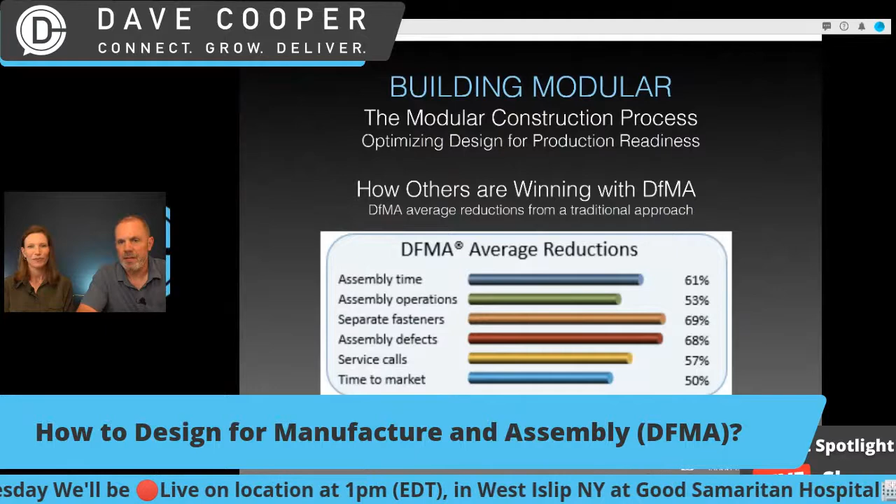Next slide. All right, what do we got here, Jennifer? Let me move this out of the way. Yeah, so this is an example of how others are winning with DFMA.

And this is a study that has been done across many different industries. This is not just construction. This is average reductions from a traditional approach across the automotive industry, the tech industry, so many different industries out there who are in the business of product development. Everybody from Dell computers to Harley Davidson motorcycles. It's all about designing before you manufacture.

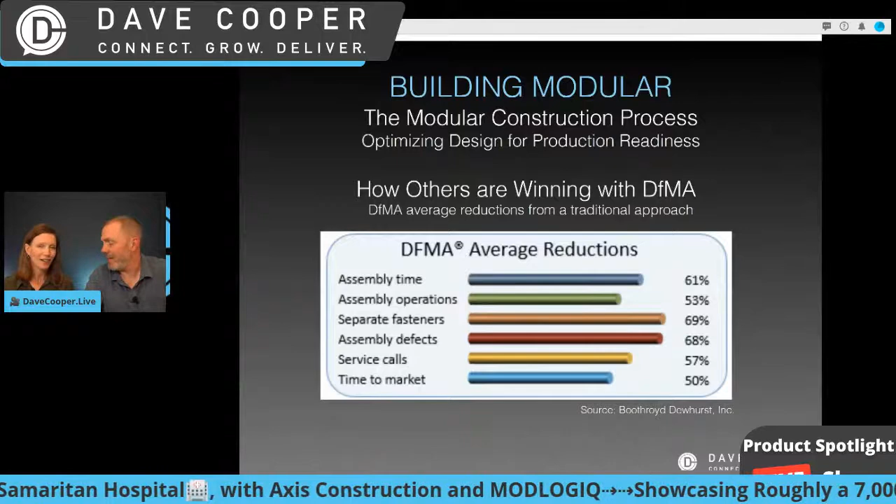So these are some reasons why this is such a powerful tool in your tool belt. You reduce your assembly time by 61%. Yeah, I mean, that's a lot. Huge number. Yeah, for sure.

Operations, huge reduction there, separate fasteners. So when you're building in terms of components or volumetric modules, there's fewer connection points on site, so there's fewer needed. If you look at this list, you're going to be above a 31% time reduction across the board.

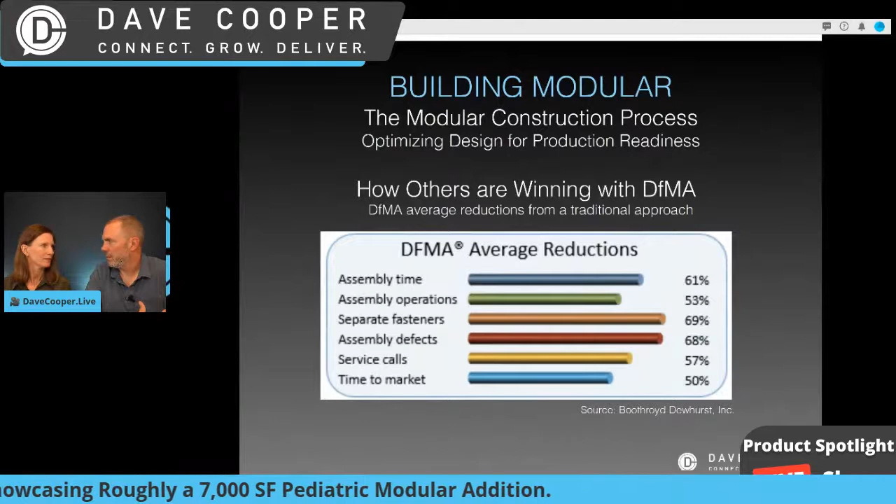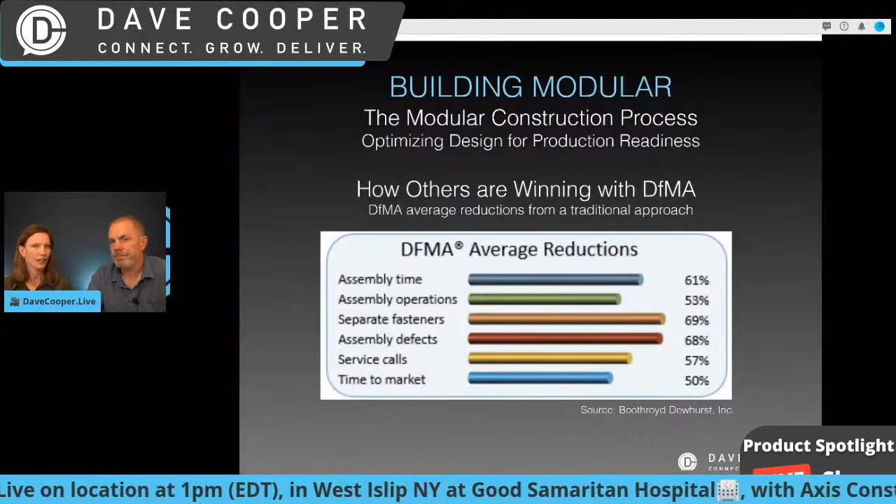And I'm just going by the separate fasteners, right? 69%, 31% increase is the minimum of what you get by using this. Yeah, and that's just it. It's what components can you build offsite, pull it forward, and still deliver that resilient, high quality, durable product.

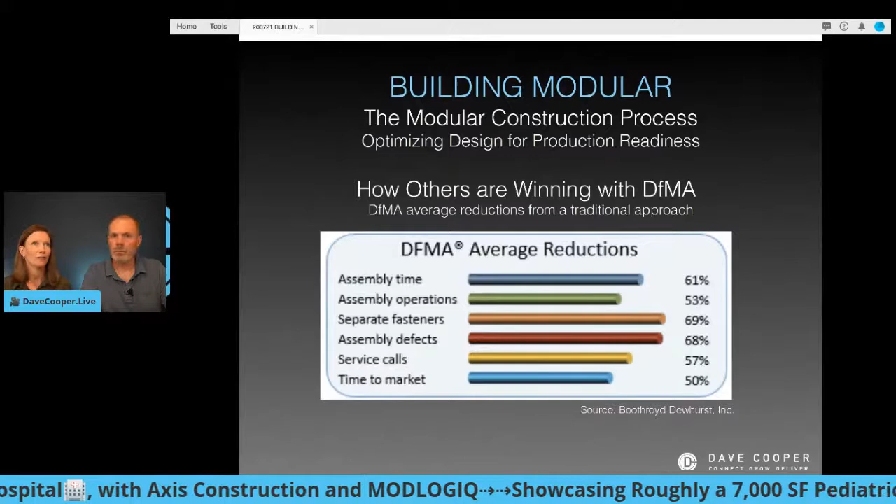Another one that I love is the service calls, and the one that everybody loves is faster to market. Right? Faster to market, heads on beds. Absolutely, faster to equity, people are making money. We were talking to some architects recently who were talking about—and obviously this was pre-COVID—

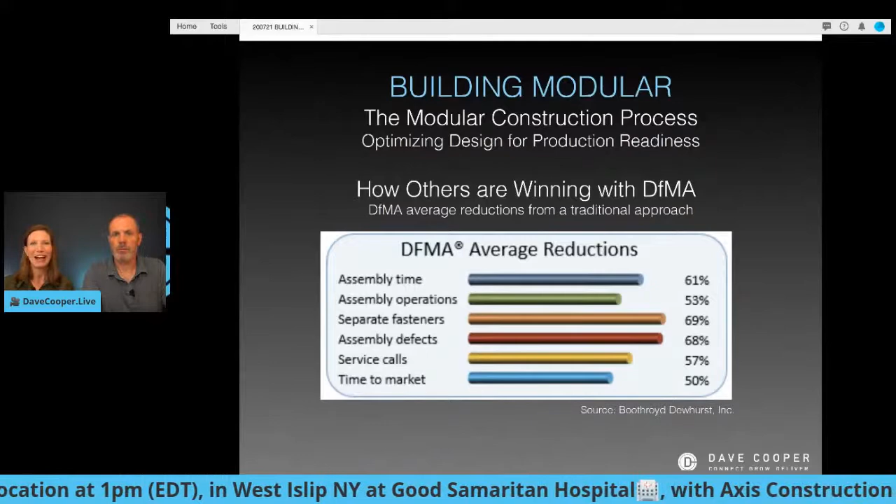the speed required to build hotels and resort locations. The way that they measure time and profitability is how fast can we get that bar open? With that beautiful view of those Florida beaches. How fast can we get that? Bring people in, open it, so they can start seeing what's happening.

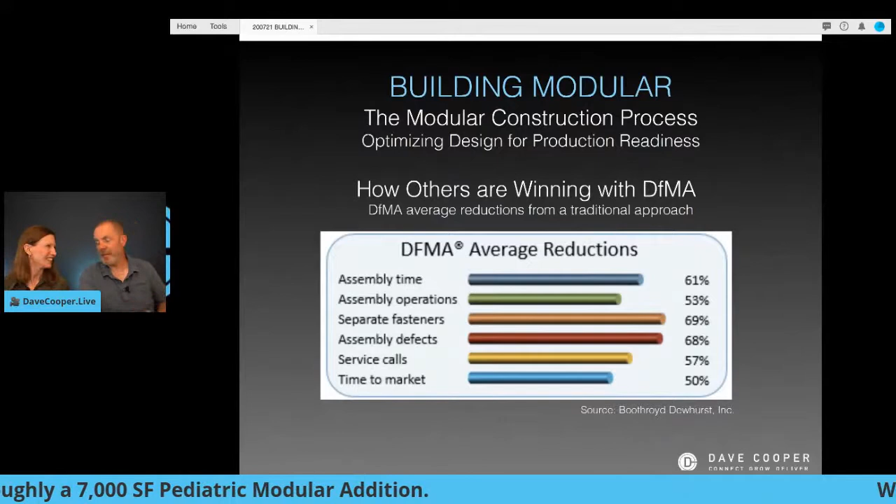Exactly, absolutely. So when you think about time to market and faster to equity, those are some examples of why this is a win. Yeah, I think this is a great visual. So why DFMA construction, right, Jen?

So we're starting here. This is a win for everybody, regardless of your method of construction, whether you are choosing to use one of the modern methods of construction, offsite, volumetric, industrialized construction, whatever word you want to use. In the end, we're building homes, we're building commercial structures.

Well, but it is fragmented. It is antiquated all the way across the board. We tout this on every live show, and people are probably so tired of me saying it, but we are. It's horrible, and I'm tired of being in last place. Right, and this is helping us get out of last place.

Antiquated, I think, is even not old enough, because, I mean, we haven't changed in 100 years. The only thing that's changed is instead of plugging in your saws, we got a battery to run your saws. That's really the only thing that has changed.

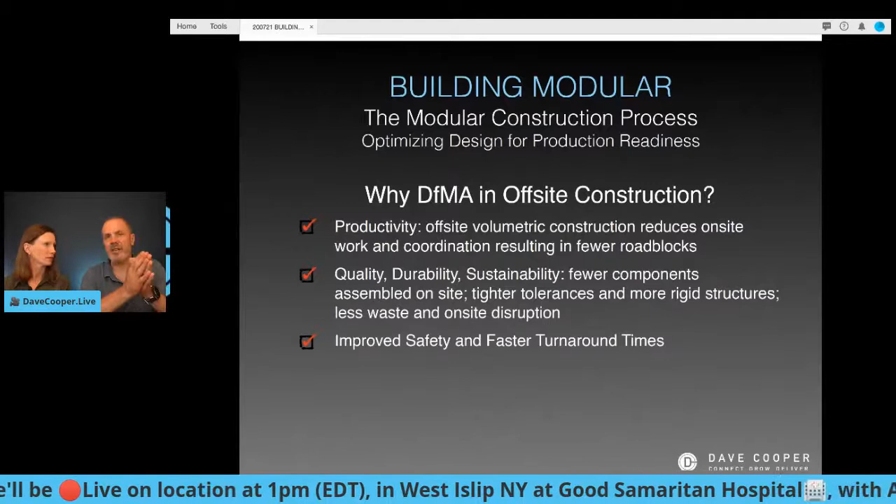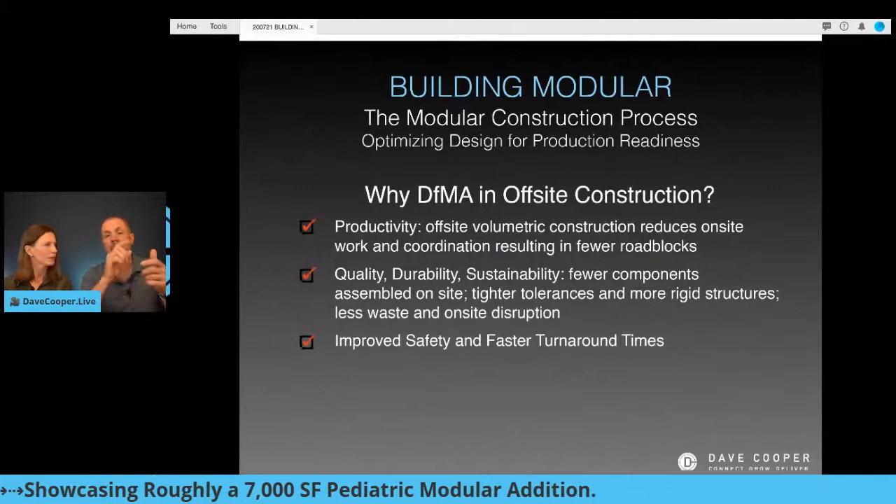So when you think about the insurance implications of that, that's a huge win too. That's the whole life cycle people don't look at with offsite construction—they just look at what a 2x6 wall costs at a manufacturing facility versus on site. They don't factor in ancillary costs like insurance savings, health savings, risk reduction. This goes all the way through workman's comp, liability insurance—it's all savings, and when you add it up, it's a big deal.

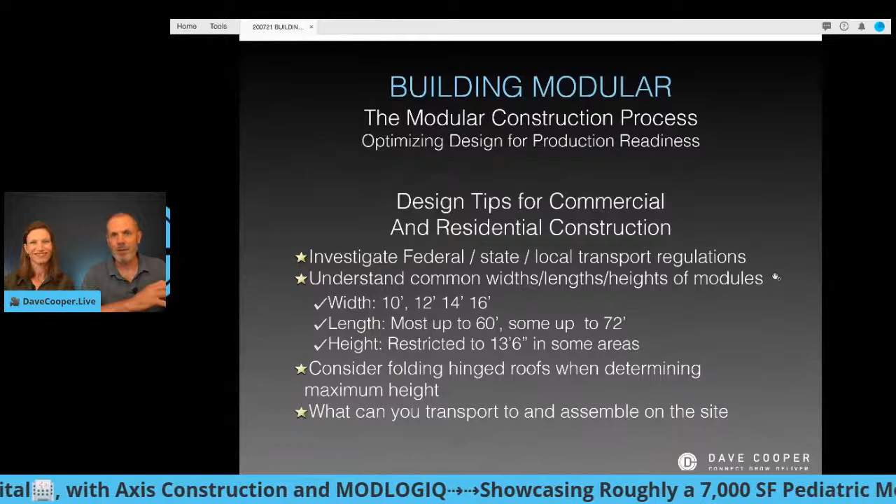And at night, they have you deliver, and then they yell at you because they're backing up in a residential or commercial area, and everything's going beep, beep, beep, and neighbors are complaining. So you need to understand all of these different regulations and rules.

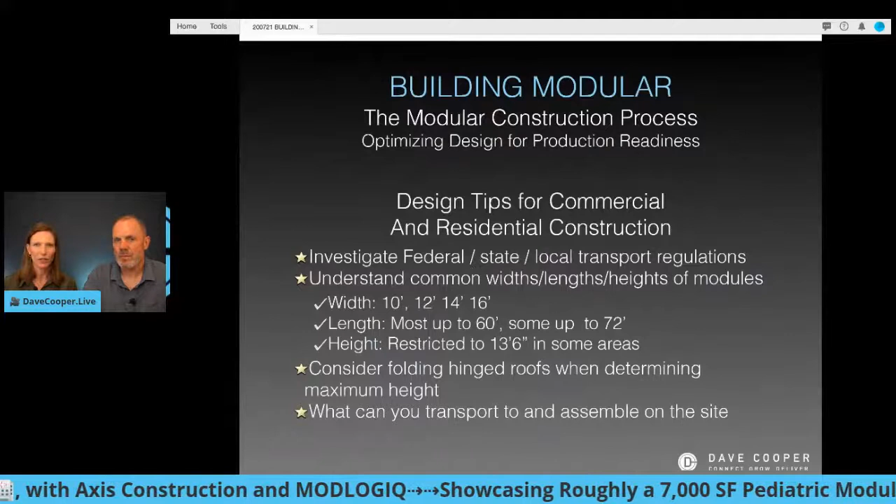So, but just in understanding, where are you going? Again, it's the logistics. It's the homework that we did a few episodes ago with our site surveys and our transportation, making sure that we can get there. Are there any low bridges or overpasses or weight restrictions, that sort of thing? And then just understand what the common widths, lengths, and heights are of the modules.

Well, that's a big deal. So it depends on where you're at, right? If you're in the Carolinas, the Midwest, out west in certain areas, you can go as wide as they can do them out there and as long as you want to go. Long, straight, boring.

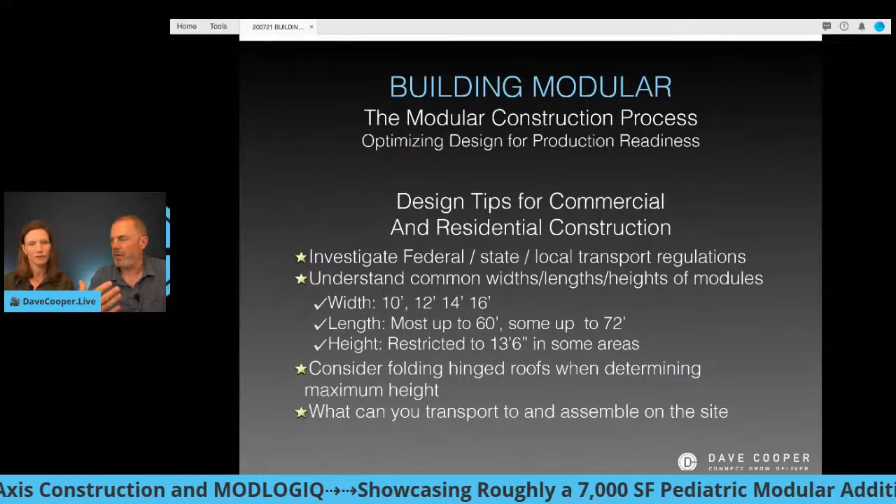But depending on where you're at, if you're building in urban lots, infill residential, infill commercial, hotels, whatever that case is, there's some limitations, and it's based on transportation. It's based on making turns. It's based on DOT, Department of Transportation regulations, on what they're going to allow you to transport.

And where do you find that happy medium between cost effective and the permitting so much it makes the job unattainable? Yeah, and that's where modular kind of falls. If you stay within certain parameters that the DOT has set, where you're building, and you really do your upfront work on where these are going, you can design this whole thing with length and height right into the design process in the very beginning.

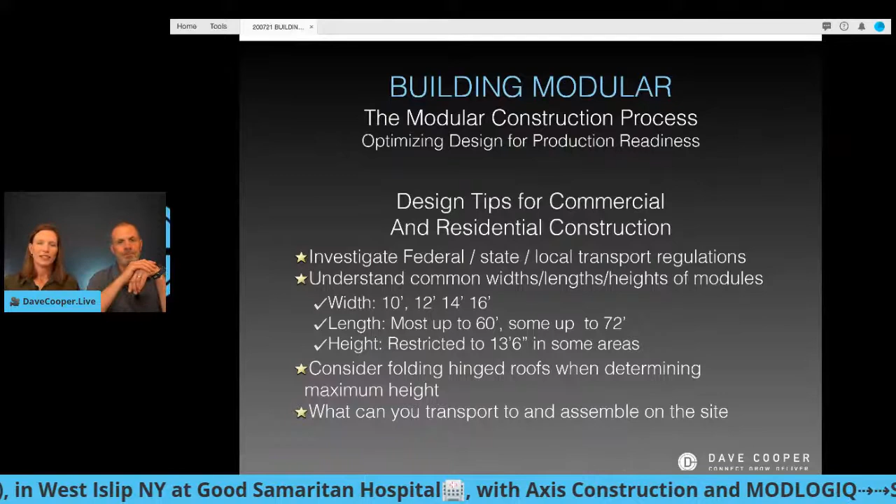Definitely. And a great example of this are the two Pittsburgh job sites that we recently were on. First was Module, and then the other was Blockhouse Residential. Both of them used modules that were 16 feet wide, 9-foot ceilings, but different lengths. And just by being inside of those spaces, you can see how big and open they can be.

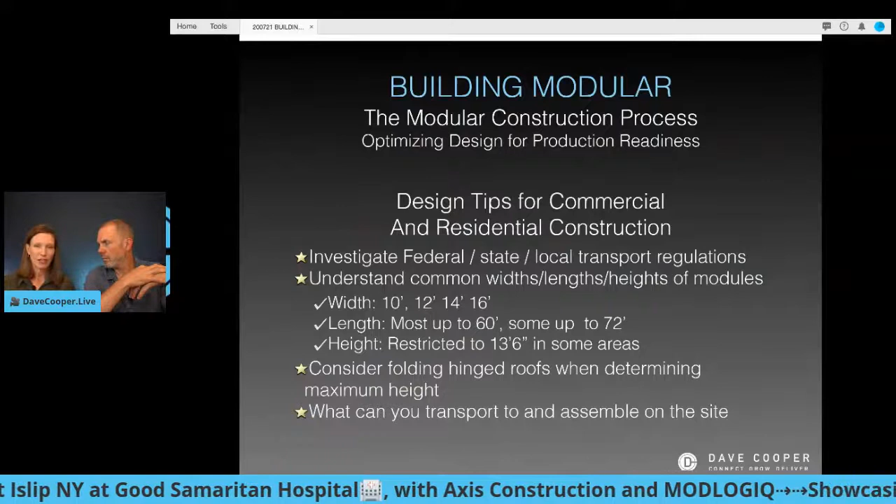And then when you start setting them next to each other and you're setting them on top of each other, and you're playing like Legos, right? You have L shape, T shape, I shape, there's so many different things that you can do with the modules, but really you want to stay in multiples of the widths, just so that you're not creating an unusual size.

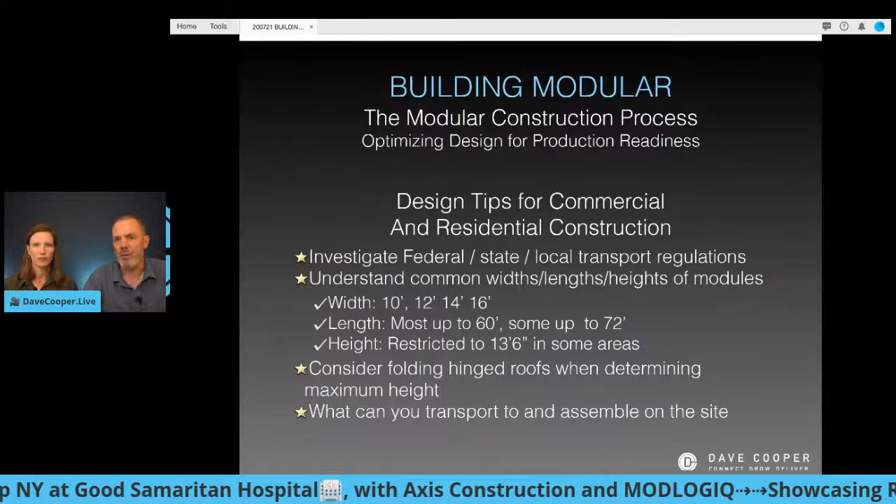Yeah, I mean, you can do it. It's not a big deal. It just depends on if it's a roof line or where it is. So I think what you're saying is, use the economy of scales, use the efficiencies of design, and by making equal parts, that happens. But unfortunately, in today's world, it doesn't always happen that way. But that's where you can design for really engineering efficiency. Yeah, value engineering, I think is what we call it.

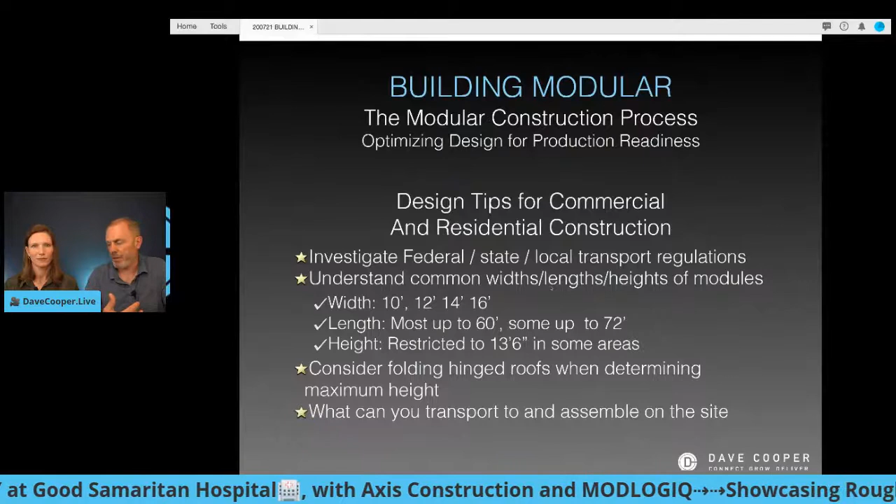Exactly. So for sure. And then considering, when you're designing, you also got to consider, like you said, your roof. Your roof adds height to all these things. So those of you that don't do modular, you may say, hey, I want a 9-foot ceiling for second floor, but bridge height's 14 feet, and you're on top of your trailer that's towing it. The numbers don't always work.

You need to understand what you're designing. You're going to go for a 12-12 pitch. That's a fold back and probably some extra roof boxes or ridgeline boxes that are going to run with that. So designing and understanding where you're designing is what, Jennifer, you're talking about. And that's understanding that. And that not only goes from the roof, but also the dormers.

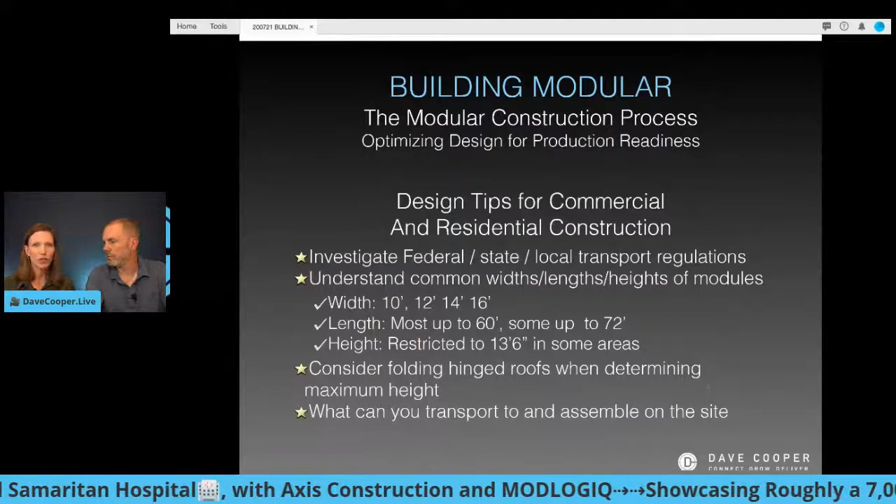Absolutely. And a lot of times, people might even put dormers on a separate carrier. They might lift them into place. They might build them as their own separate units. So there are lots of creative ways and lots of workarounds to still get that custom look that you're looking for. Just keep in mind, when you're working within these parameters, you are creating those efficiencies, those economies of scale. That modular construction definitely offers a unique advantage.

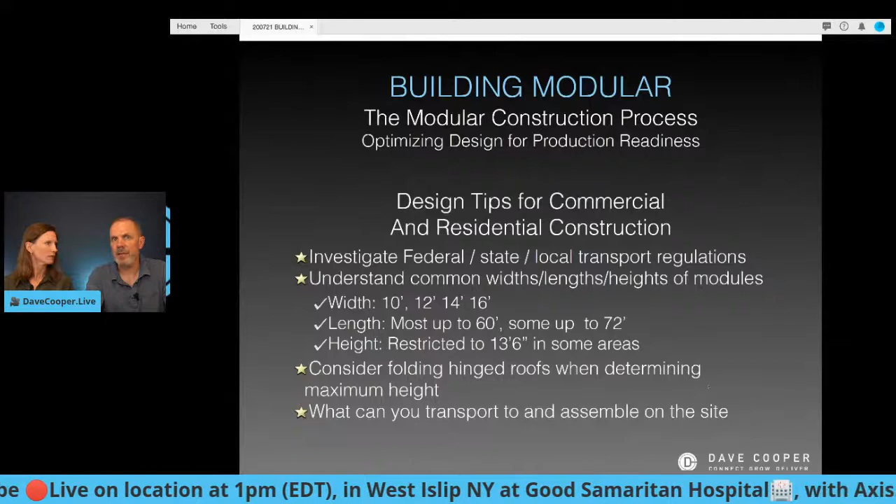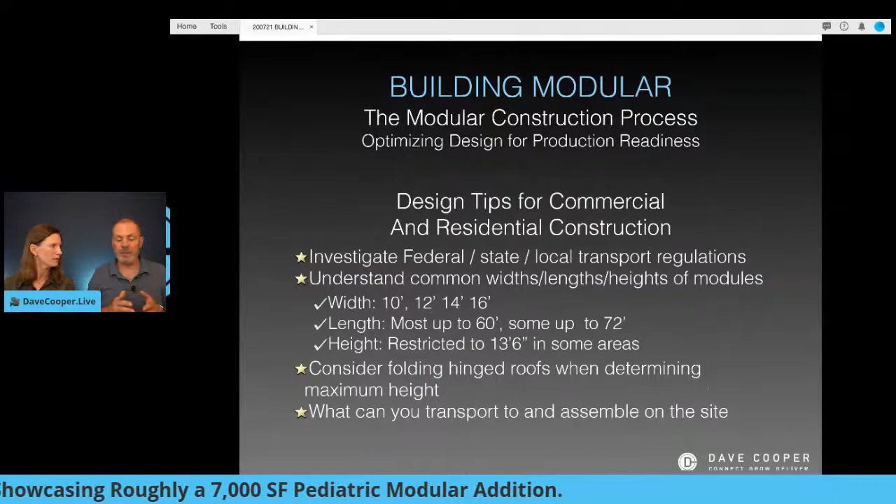Sure does. And DFMA isn't necessarily designed for the custom one-off builder, right? They can use all the practices, they can do those things, but there are also things that you can incorporate on site. The DFMA standards and the really great efficiencies come out of residential, commercial.

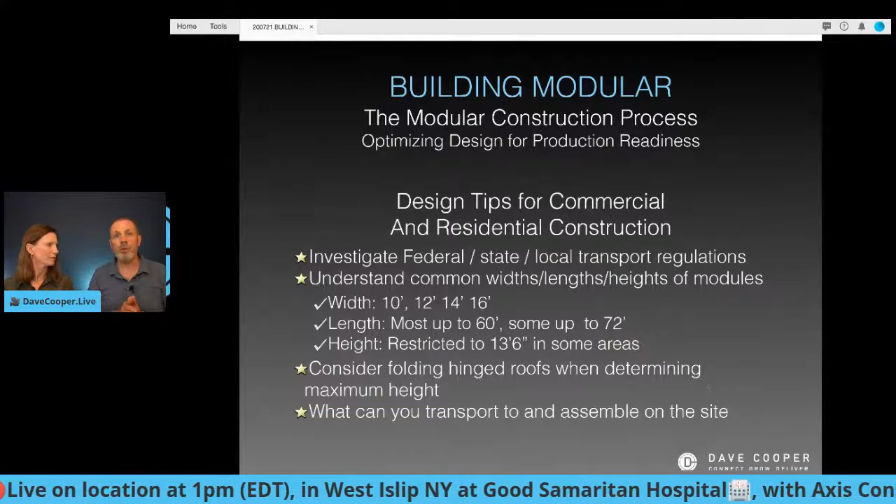So when I say residential, repeatable business over and over. All the studies are showing that that's where the residential market's going with the millennials and others, coming up with great designs, interior layouts, high efficiency, low energy build, healthy homes is where it's heading.

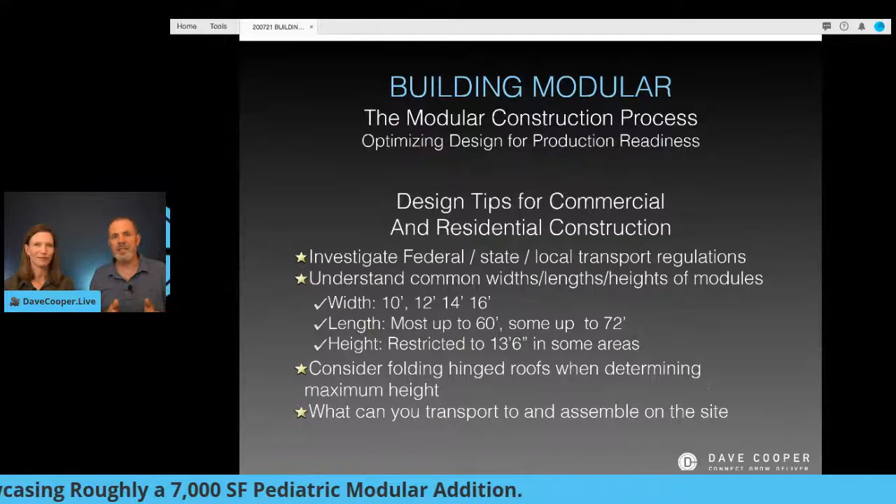So what does that mean? That means we're going to be able to get more into a DFMA process on a lot more homes in this country and help make up this 1 million home deficit that we have. Absolutely, with healthy homes, by the way. Healthy homes, so that's the goal.

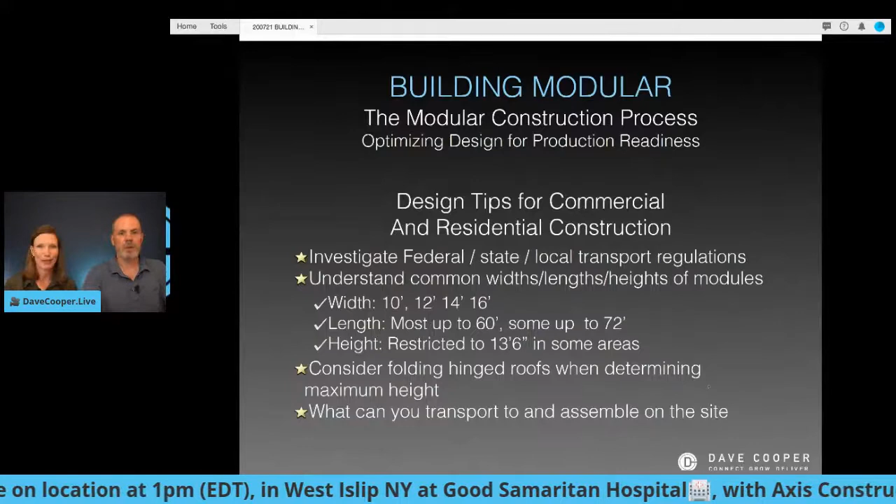Yeah, so next slide. I saw the look. What are you doing? Sorry.

There we go. So Dave sort of touched upon this, roof lines definitely come into play. It's something that you have to plan for in terms of what that module will look like when it's being transported, and what those dimension lines are. You have to know your heights, right?

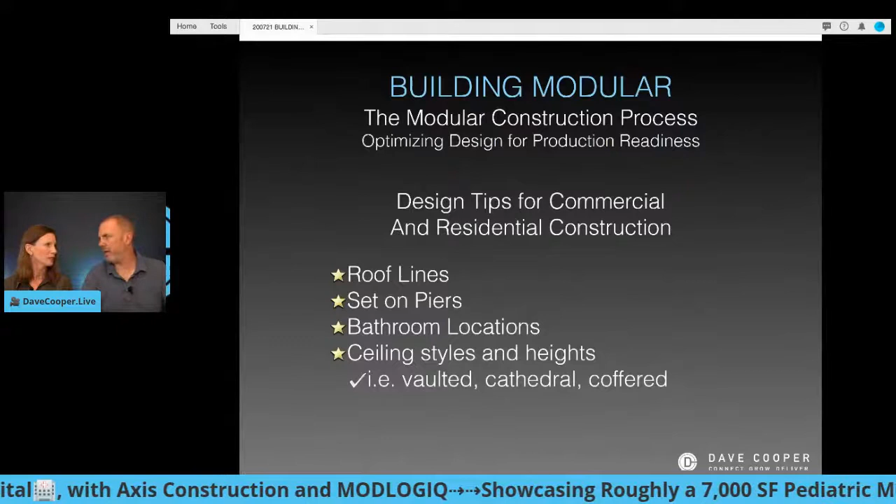And this is where getting into 3D modeling, the factories can help you with this too. We've been doing this a long time. The factory's been doing it even with their 2D CAD programs and what have you, but getting into 3D modeling, you can BIM all of this out.

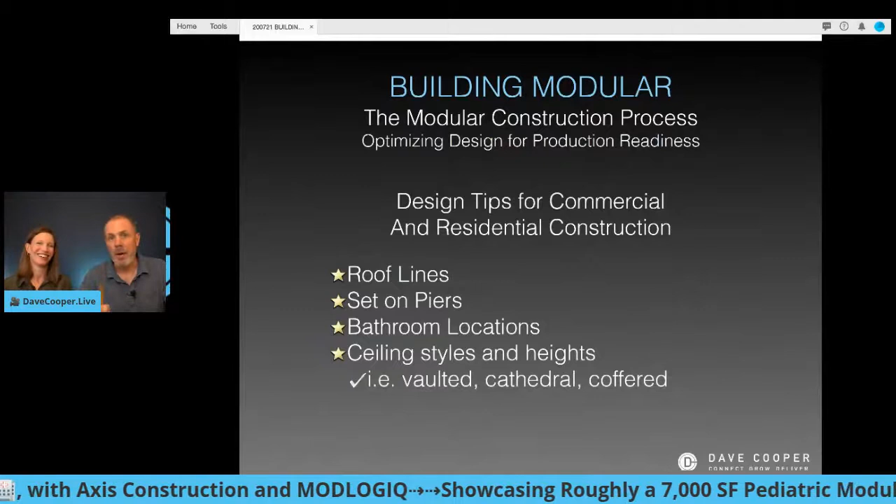You can look at bridge heights if you want. You can say, hey, I want 20 PSI in my tires because 30 PSI is going to be too inflated to get me under the bridge. I'm kidding, don't do that. But we've had to do that to get under a bridge here and there. The reality is you've got to pay attention to all these things.

Roof lines make a big difference, not only on height - I've got my pencil like I'm a teacher - not only on height, Jen, but guess what else it makes a big difference on? Width, right? Yeah, of the overhang.

So when you're shipping a module, whether commercial or residential, most of the transportation rules are going to say, if you have an exterior light or an exterior GFI, that counts towards your width. If you have a GFI box cover on there with the plastic cover, that counts towards your width in a lot of states.

So these are things you have to look at. If you have your eave overhangs, you say, I really want that 16-inch or 24-inch eave overhang, great, you can have that. We've got to look at it differently and flip them back forward, because guess what? It counts towards your width in a lot of states.

So remember that when you're designing, that height and width isn't just about getting under bridges and through an underpass. It also has to do with the regulations, and all the little things count.

Yeah, absolutely. And listen, this is all about getting through that first exercise, because once you get through that very first exercise, you're going to learn so much along the way. It becomes very real, that learning. Should I give my education costs money speech, or have they heard that too many times? Education costs money. All right, we're moving on then before I get thrown out.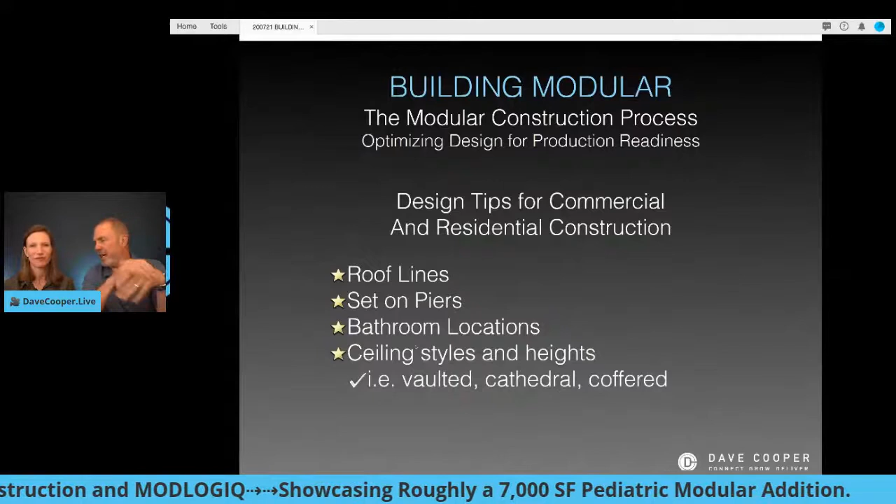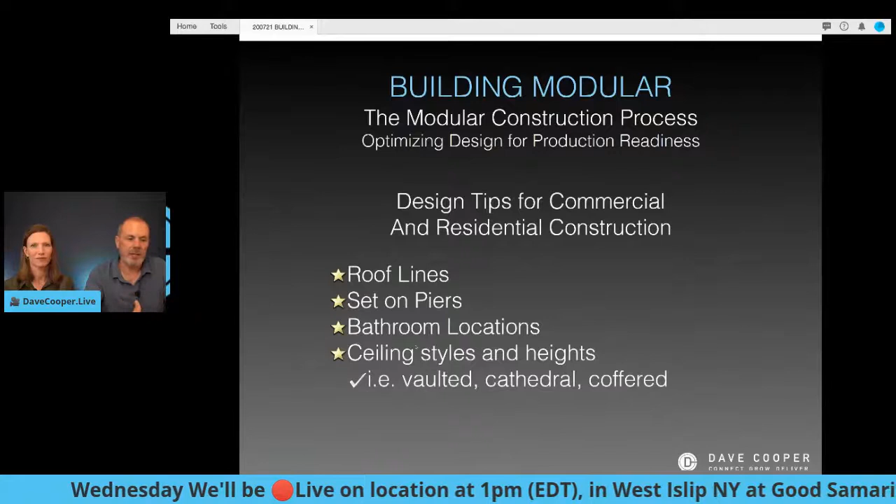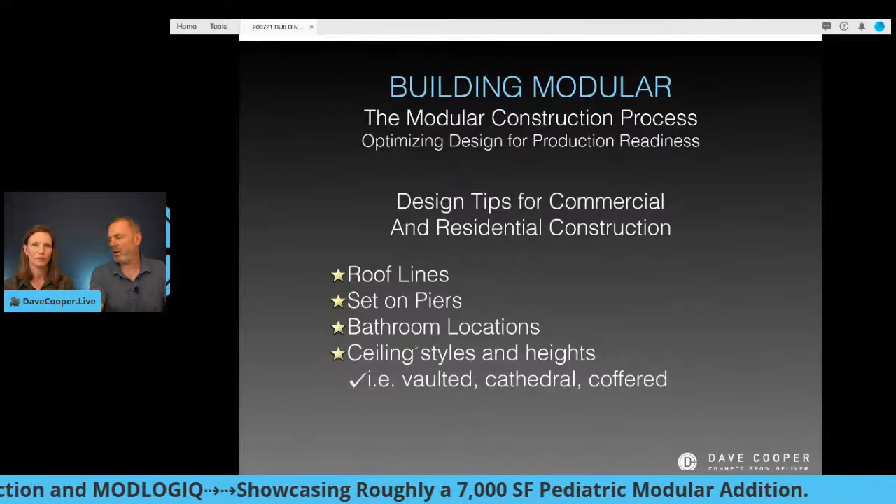Okay, so here we go, Jennifer. Ceiling styles and heights is also another issue when designing, not just ceiling, but that plays into the ceiling height, right? You want vaulted ceilings, cathedral ceilings, or any of those things. They all play a role in what you can do and what you can't do at the manufacturer. However, you are not limited to anything that you want to do, even with DFMA. It's just a matter of what you take on site, because every house is a square for the most part.

Yeah, but this just brings up a really good point, because when you're doing some of these design elements, especially for those of you who are still working in two-dimensional plans with your clients, you have to think about where that coffered ceiling crosses a mate line, possibly, or connects with a flat ceiling, and how does that get built in the manufacturing plant? So these are the details that you need to be looking at.

Again, if you're modeling in 3D, it's much easier, but if you're working on paper, you just have to see where those different ceiling techniques come together and where you're crossing mate lines. So the marriage line is a really important element from a design perspective, and we're going to talk about that a couple of different ways. But when it comes to where different ceiling styles meet, you really need to pay attention to that.

And I'm just going to back up - you don't have to put it up - just in terms of homes that are set on piers and other things, like what we were talking about earlier with bathrooms in the pods.

So you're not limited to where your locations are for bathrooms, kitchens, or toilets or any of those things, is what we were getting at.

However, with DFMA and assembly, if you design houses with the core house having bathrooms and kitchens all around it, the efficiency of that structure is through the roof. But you're not limited to that. You can have bathrooms on any side of the house you want, just like any traditional home.

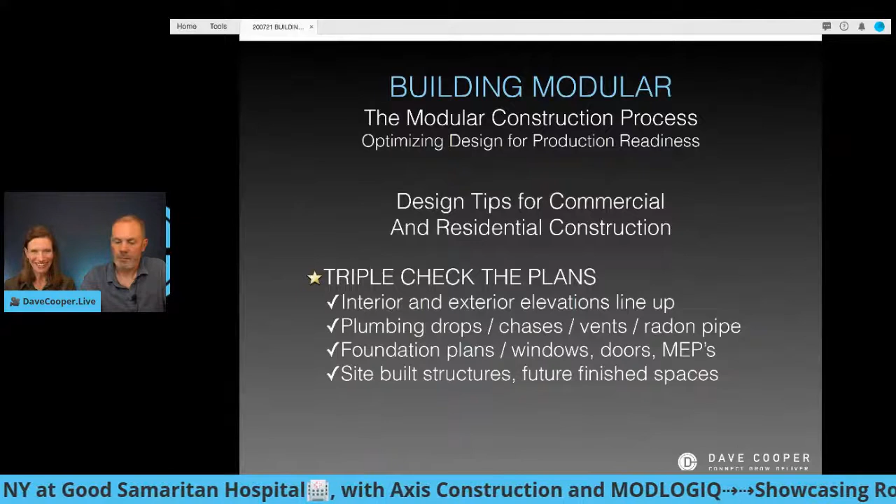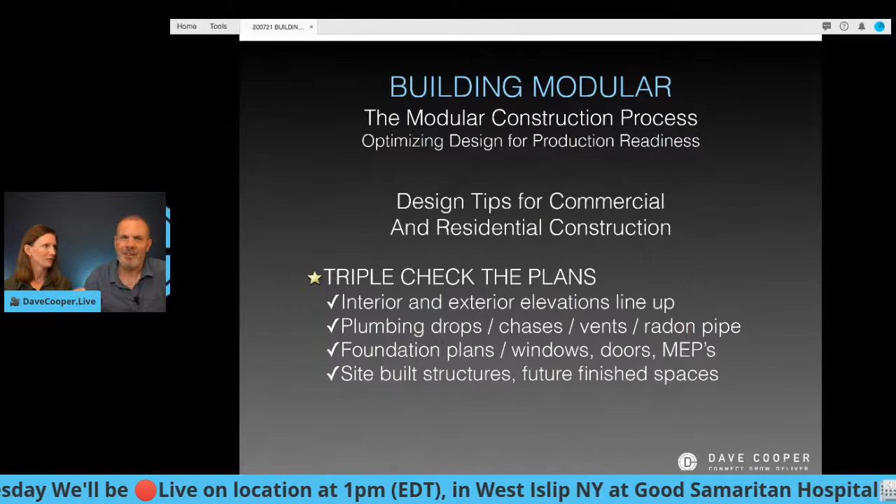So what you're saying is if I decided I want a 9-foot first floor, I should be using a 3059 window instead of a 3049, to get the height difference, otherwise you'll end up with 2-3 feet above your window. The reality is, you put in an 8-foot door versus your standard door - do you leave your windows down, do you leave them up? You have to double and triple check all these things.

We always say, when I ask the manufacturer, make sure you put the height from the ceiling to the top of the trim, or floor to the bottom of the trim, on your plans in a detail, so you can see what you truly have throughout the house, first and second floor.

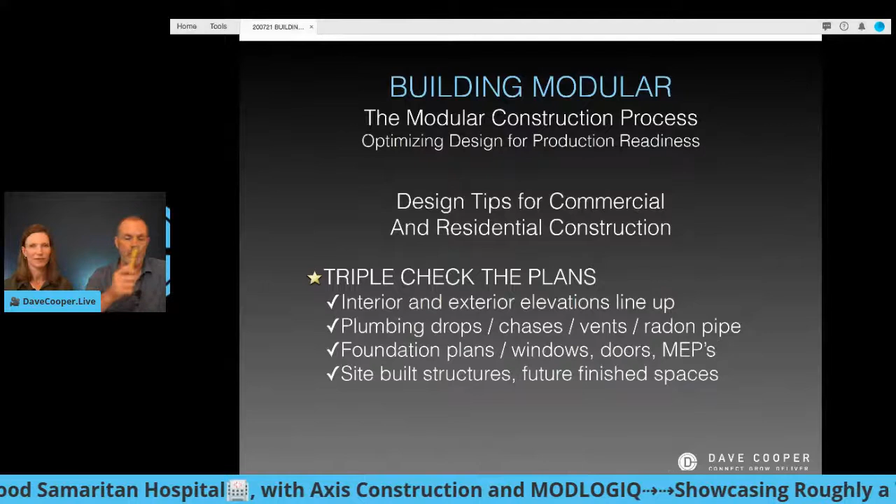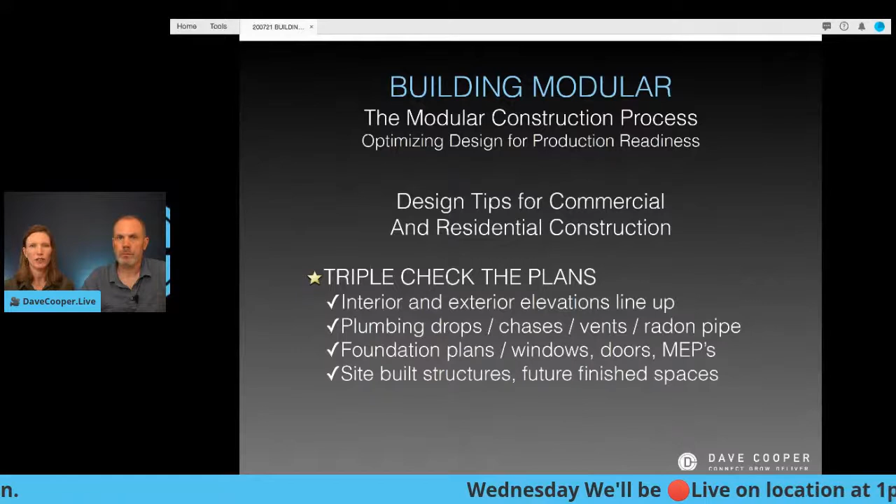Any of these envelope decisions - window sizes, door sizes, roof pitch - you want to lock that in before you go to engineered plans. What we recommend is a check of the plans prior to going to engineering. That's when you want to lock in your ceiling heights, your structural openings, and your roof pitch for sure. Some of the cosmetic things can wait a little further down the road.

But the other thing you want to think about is future finished spaces - attics or basements or spaces above site-built components like a garage. You need to call out where you might need some plumbing, where you might need some chases, where you might need some additional light switches. Future chases in modular, volumetric, or even panelized - having that stuff in place is always smart.

Let's talk about mechanical chases. If you're going to run your HVAC on site, or maybe the manufacturer is going to do it depending on their setup and if they have the ability to do that for you, you really have to understand that.

We were at another job site shooting, and same thing happened - the chases didn't line up. They had to reroute and redo utility space and closet space to accommodate rerouting the system, and that's even with a high velocity duct system, not even the 12 by 24 trunk lines. Thankfully they were small units that needed reconfiguring, but this is the stuff that happens even with people who've been doing this a very long time.

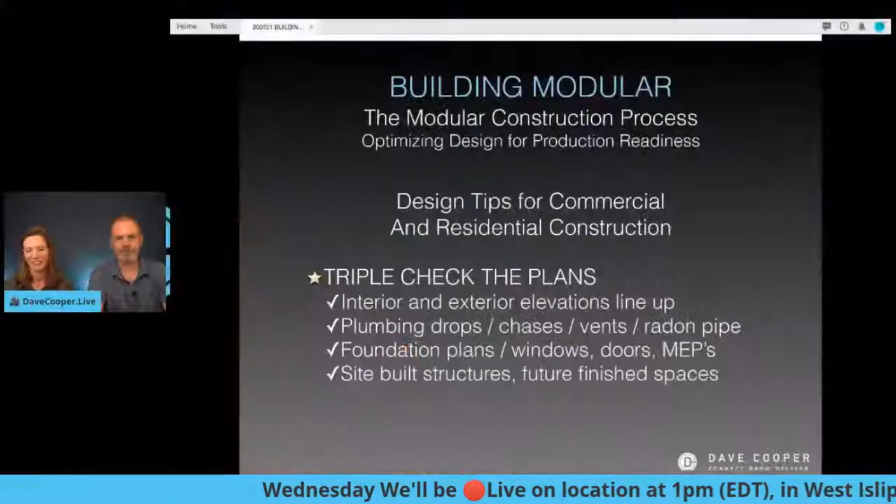So one of the things, even with DFMA, that you really need to do - did I cut you off? Did I cut you off?

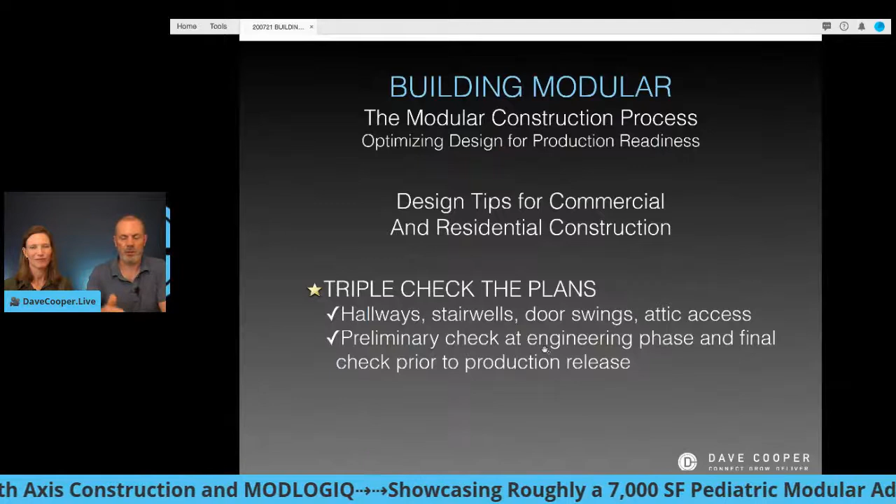No, you're good. So one of the things that's super important, and we said this before, is a lot of manufacturers want you to sign off on their stuff - and there's contract negotiations on that we can get into another time. But what you truly want to do is get your highlighters and pens out, and you need to look at every inch, every window, every door, every location, every swing.

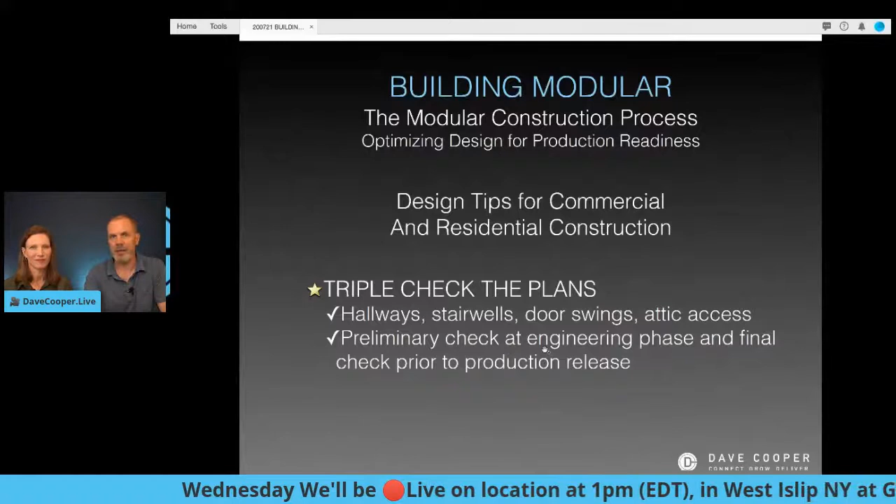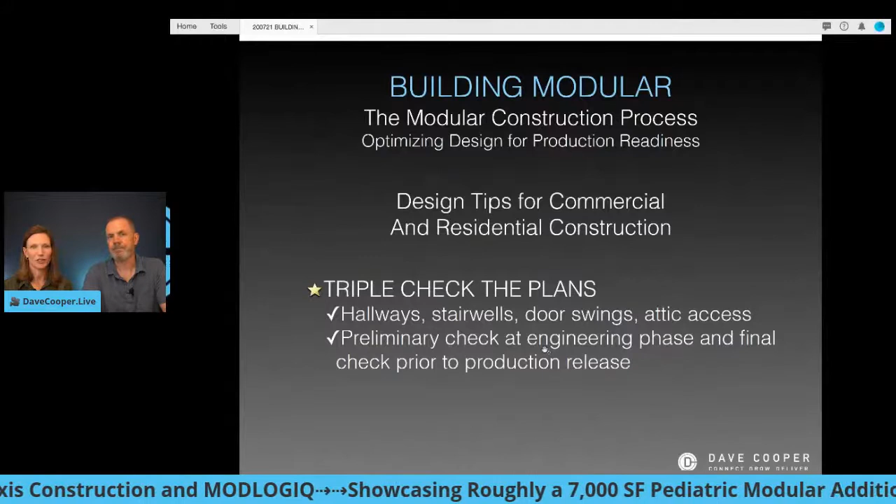Make sure the trim detail's the right width, so you don't end up with a piece of cut trim in a corner and not able to do your light switches. You need to go through these plans piece by piece. We don't see too much of it lately, but there's always that one-off chance for people new to the space, not thinking about how far, like a center hall colonial, where that door swing goes, where the stairs are in relation to each other. You have to physically and virtually walk through your floor plan and touch everything on paper, and line everything up.

Yeah, 100%. Rick Hawkins is giving us some shout outs. Thanks, Rick, man, we love it. Planning, well, we did that one. You know what, Rick? This is actually going to be my thumbnail. Oh my God, I'm going to use this as our thumbnail. It just says it all. Really, we said this. All right, thanks Henry, let's go here.